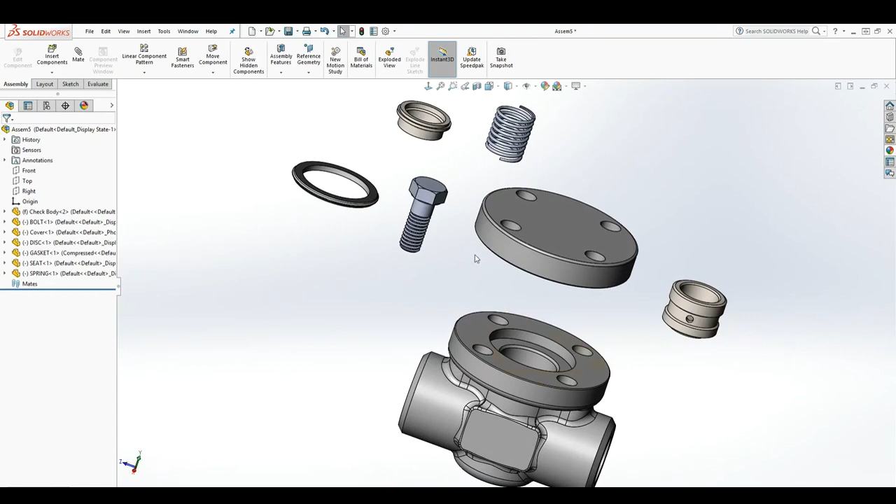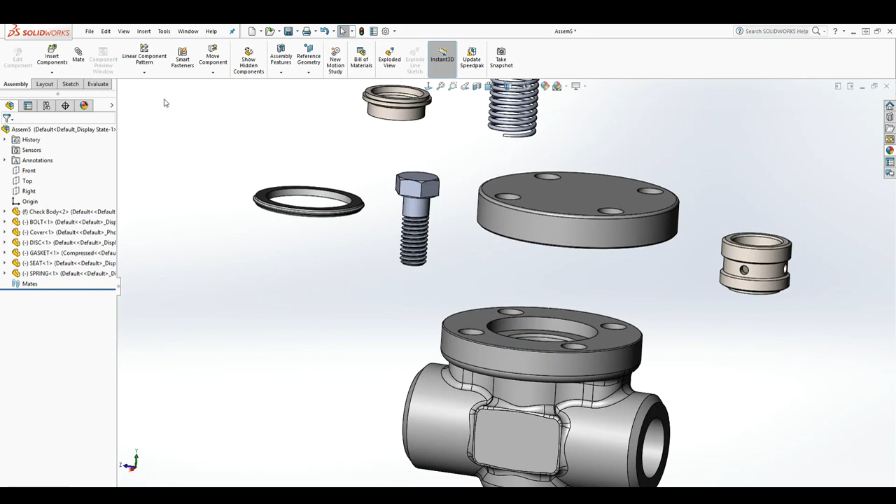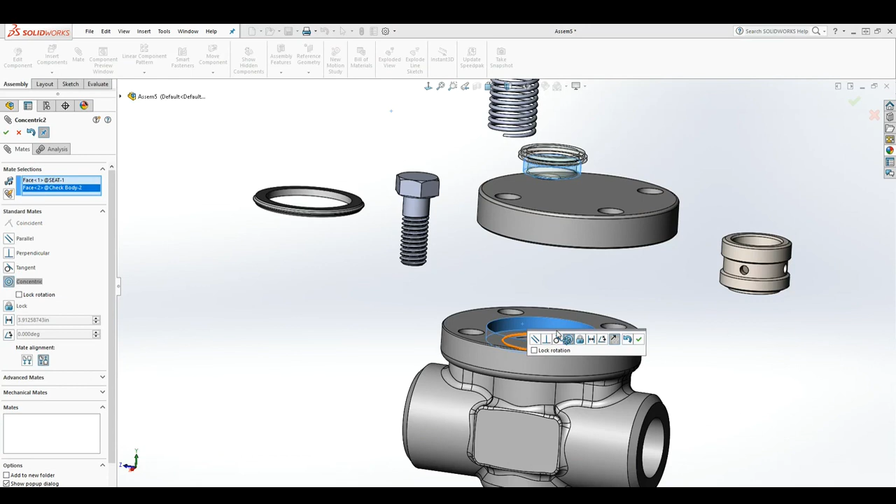The first thing we want to do is start mating our parts together. The seat goes into the valve and sits on that face. So we click on this face and click on this face. Because these two faces are round, you can either click those two faces by holding the control key and clicking mate, and SolidWorks will automatically apply the mate. The concentric mate is the one that applies, which means the center line for those two faces is on the same center line. You can either click those two that way, or select mate then click this face and that face, and you still get the same result. We'll click those two faces and click OK.

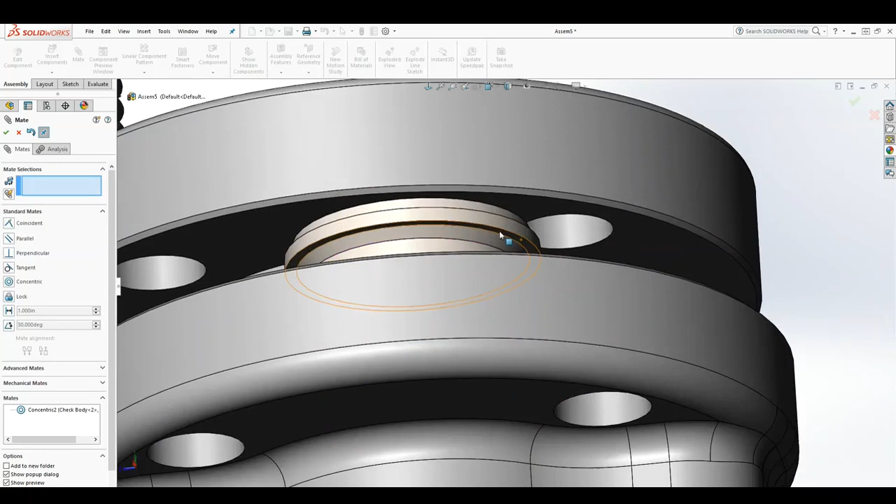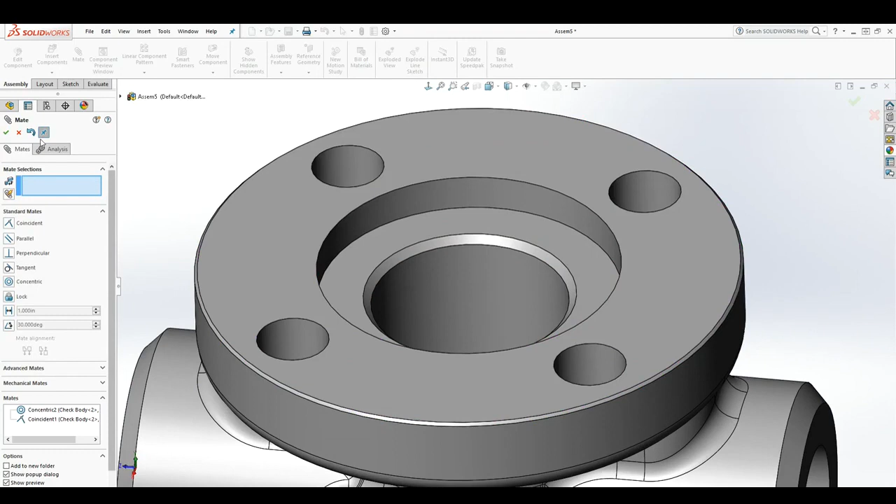Now this face is on the same center line as that, so it's constrained to that face, we can't drag it anywhere. The next thing we want to do is this face - you can drag this up just to see what you're doing. We're still in the mate option. This face, we want to mate it to that face and click OK. When we section it about the right plane, you can see that seat is sitting on that face, concentric and resting there, which is what you want.

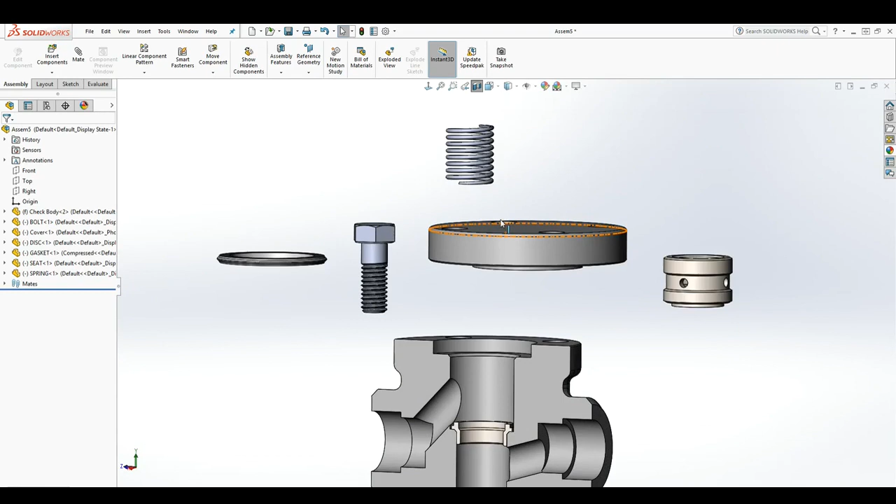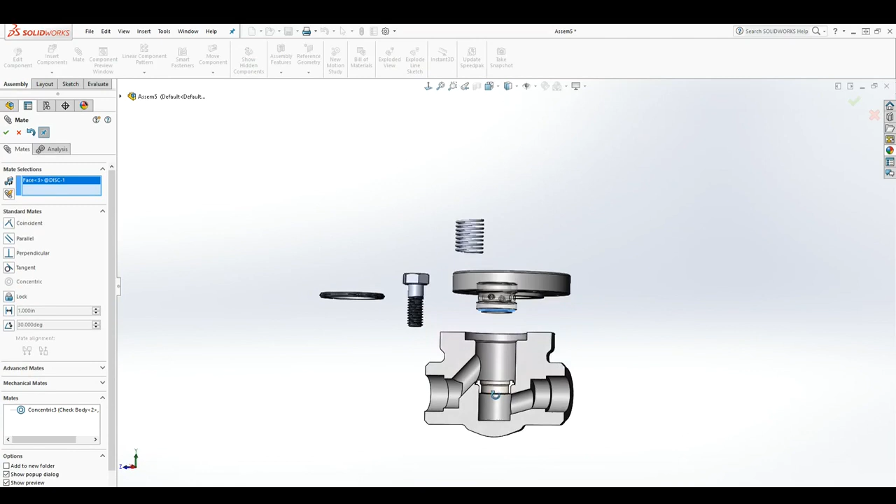You can also leave your section open while you mate your part. For the next example, let's click mate, select this round face and that round face, and we still get the same results. Now we want to mate this face to that face and click OK. So now we have our seat, and our disc is also constrained.

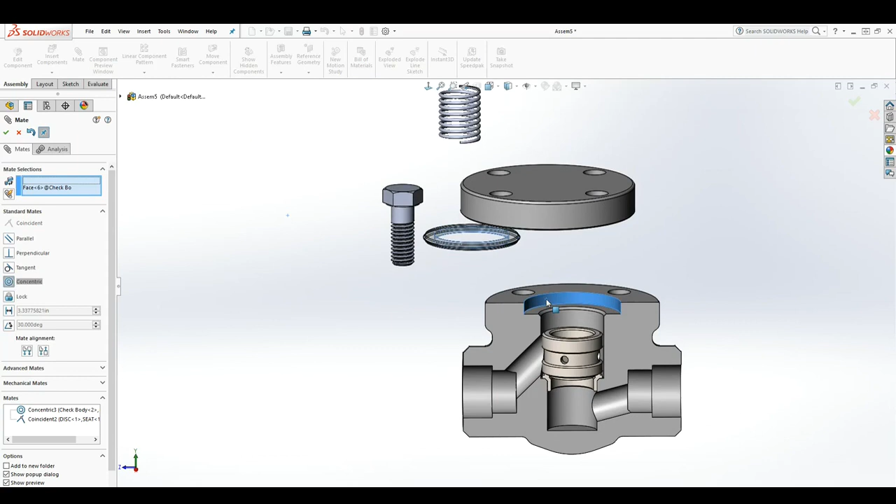Now we want to do this gasket. We'll click constrain, then on the mate click that face and this face - again they are concentric. Now click this face and that face to mate it to that top. So now we have our gasket in. Anytime you're mating something to the inside, it's best to section your part so you can select the right mate.

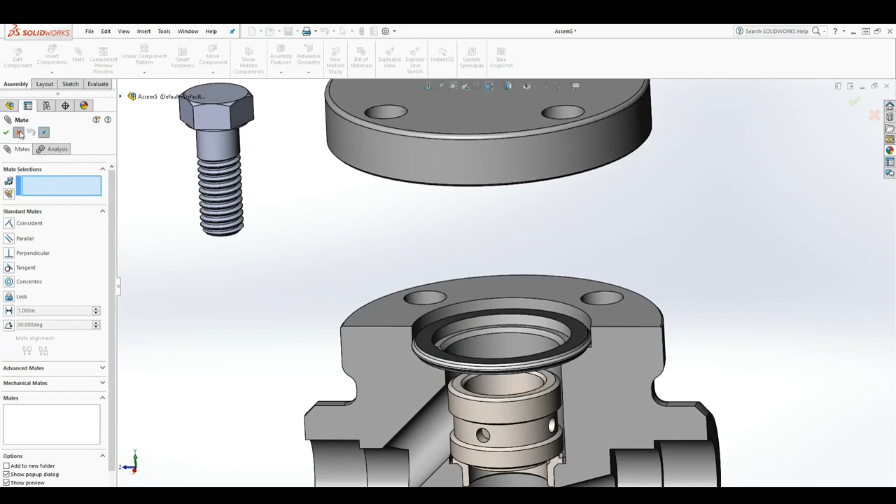The next one is we want to do this spring, but the way this spring is modeled, we don't have the right selection available. Let's try this face - I'm not sure if this will work. See, it's only trying to make it tangent. So what we need to do is, there are several ways we can approach this.

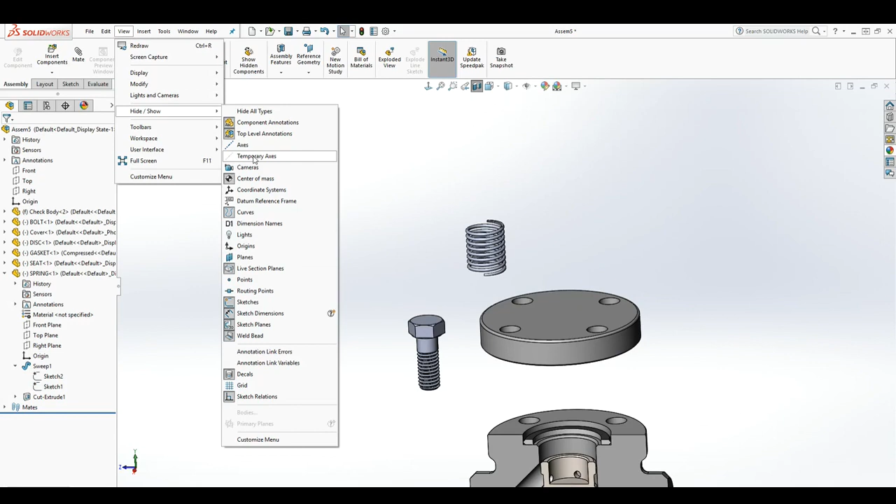We can click on the spring and click this drop-down to show the sketch of that spring that has the center line, or another way is to click view, hide/show, and show the temporary axes. Oh, that doesn't have it. It's not showing the temporary axis for that spring, so we're just going to hide the temporary axis. What we can do instead is mate the planes.

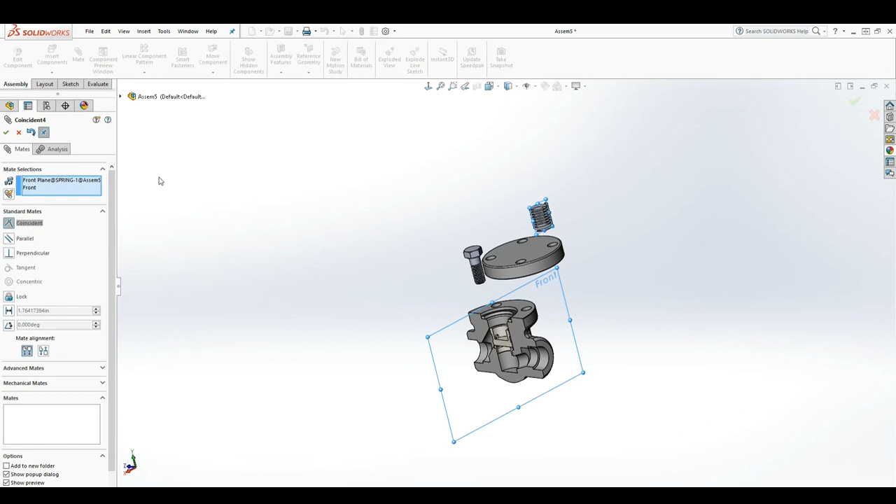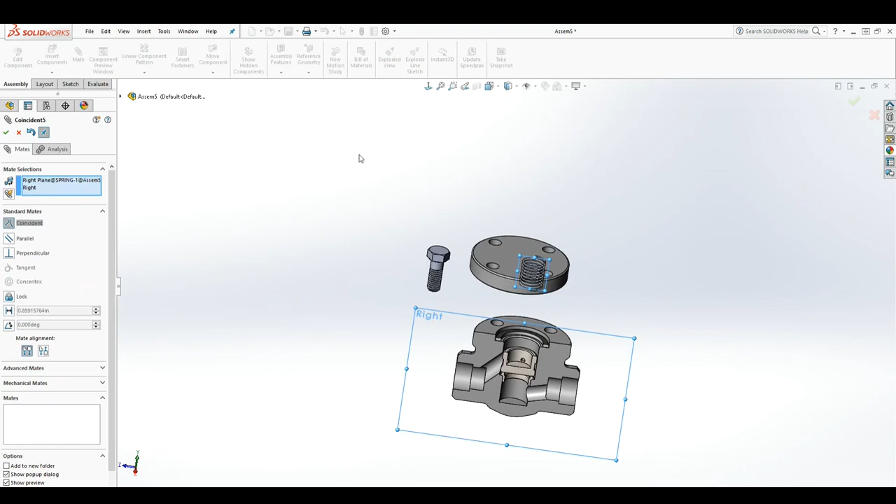We would click the front plane of that spring and the front plane of our assembly, then click mate. Now it mates that spring to the front plane. Then we want to do the same thing for the right plane - click the right plane of that spring and the right plane of our assembly, and click mate. Now our spring is fully centered in our assembly, which is how we want it.

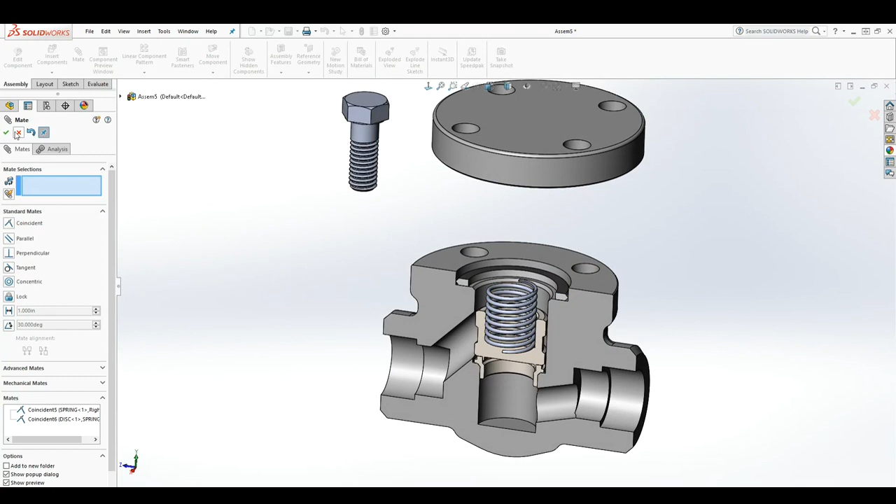Now we can select this face and mate it to this face and click OK. So now our spring is fully centered. What we did is we actually mated the planes together. That's what we discussed about design intent, because depending on how your part is going to build in the assembly - the way we built this spring, our planes are on the same plane as the assembly - it makes it easier for us to just mate the planes together.

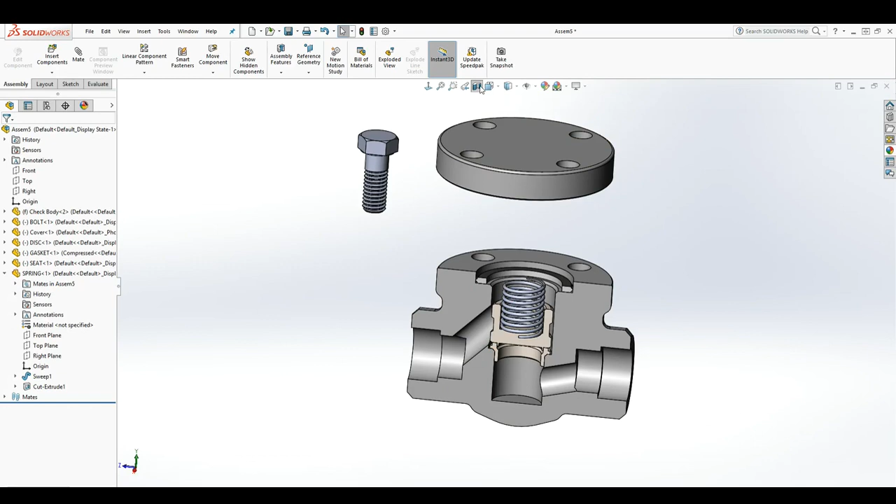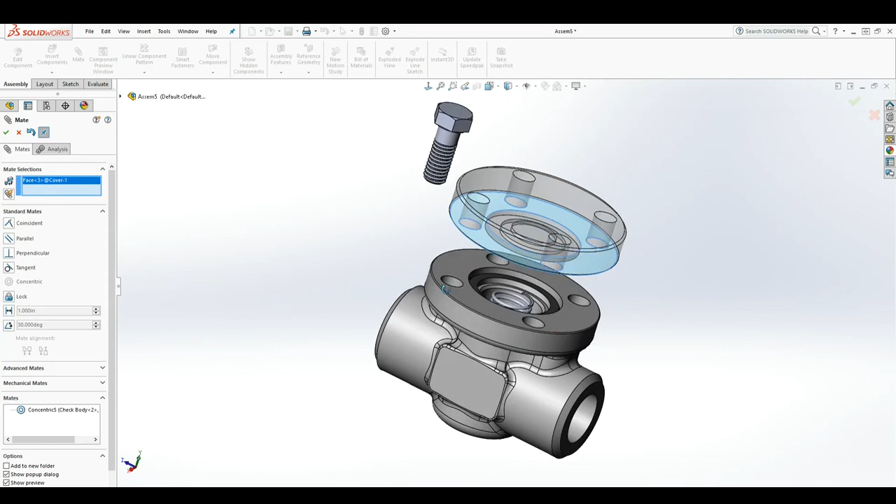Now that we have all the internal parts in, we can unsection it, and that is what the assembly looks like. Now all we need to do is click this face, click mate, and click this face, and click OK. Now those two faces are concentric with each other. Now we need to click this face and that face to mate those two together, and we have our valve cover.

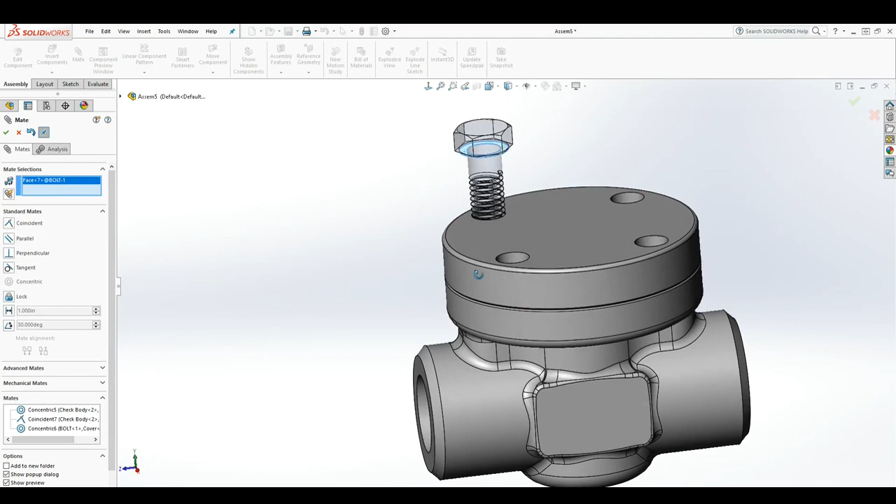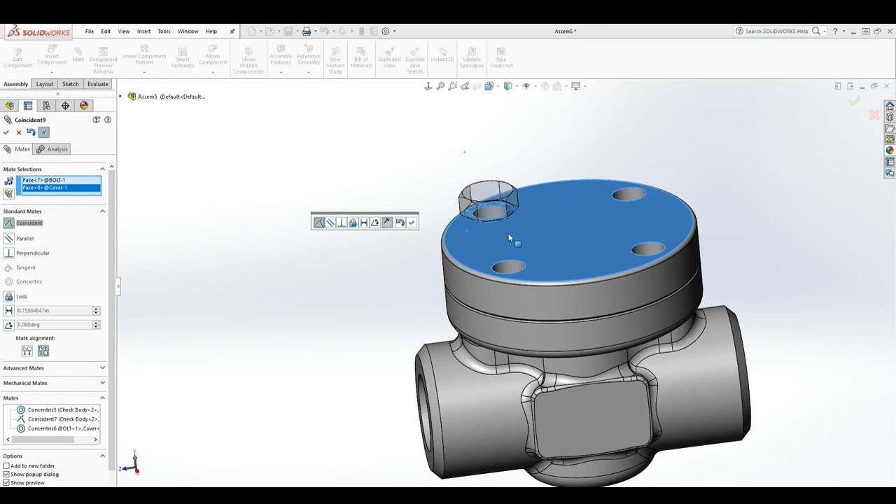The last thing we need to do is click this face and click that face - again you have your concentric. We'll click this face and that face, and it's coincident to each other. How the parallel works is, if I click parallel, it'll just make those two faces parallel to each other. If I click perpendicular, it would not work because of the selection - it doesn't apply. So we're just going to select coincident and click OK.

Once we are done, all of our parts are mated. If we section it and click OK, as you can see, all of our parts are mated in there, and that is how mate works. Thank you, I will see you in the next lecture. Bye.